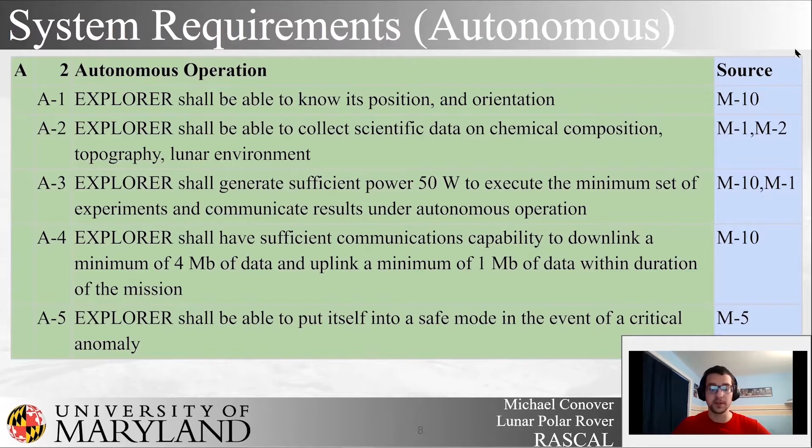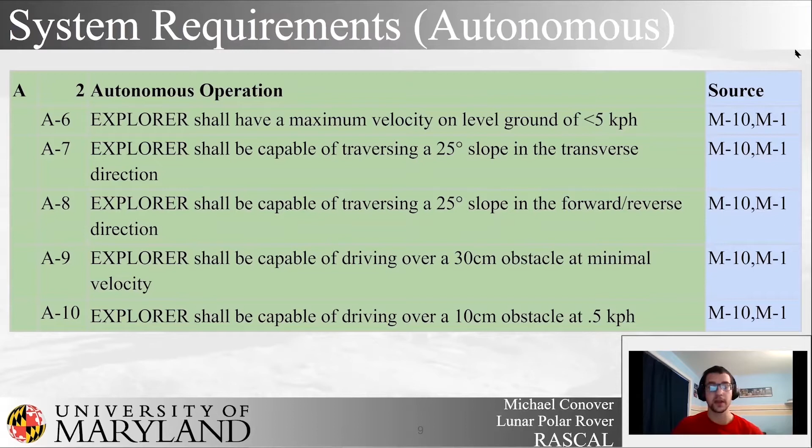Requirements were created for both the autonomous and crewed portions of the mission. Autonomous requirements include knowing position and pose, a collection of high-priority science data, and the ability to enter a safe mode in the event of a critical anomaly. The rover will also have sufficient power and communication capabilities for the operation in this phase, with the ability to have both uplink and downlink with Earth. Design requirements were set for a maximum velocity and slope in which the rover can traverse, as well as capabilities for driving over various sizes of obstacles.

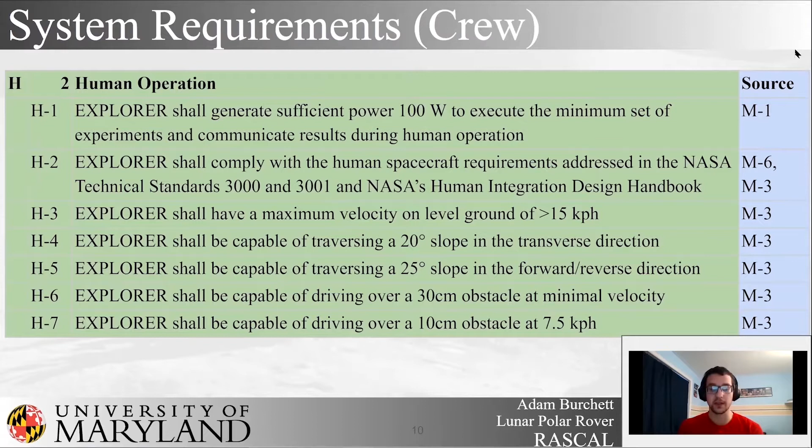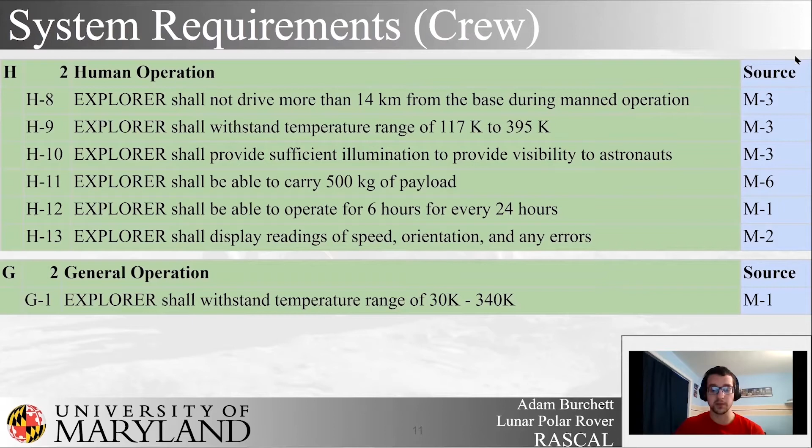Systems level requirements for the 6-day human operation of the mission include the generation of sufficient power needed for EVA tasks, compliance with the NASA technical standards and handbooks on human integration, and maximum velocity, slope constraints, and obstacle clearance requirements during the crewed operation. Explorer will be constrained to a 14-kilometer range for missions away from the landing site, support a payload of 500 kilograms, and will operate for 6 hours every 24 hours during the crewed phase. The rover will be able to interface with the crew and provide information critical to human missions, such as the rover speed, orientation, and battery capacity.

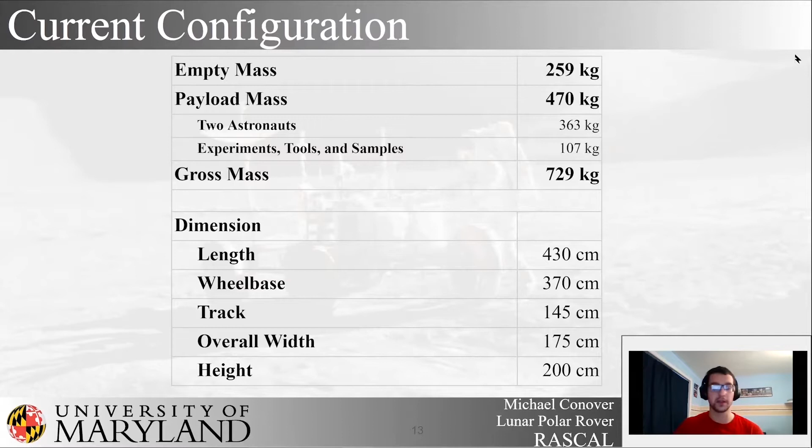The power suite for Explorer includes a battery that will support 6 hours of crewed operation with 90% efficiency. It will operate at 108 volts and will provide 60 amp hours for operation. The battery will have 30 cells in series and will provide 6.5 kilowatt hours of energy and will have a mass of 48 kilograms. Explorer will have 2 solar panel support arms, each carrying a quarter circle panel with a surface area of 1.7 meters squared and an efficiency of 30%.

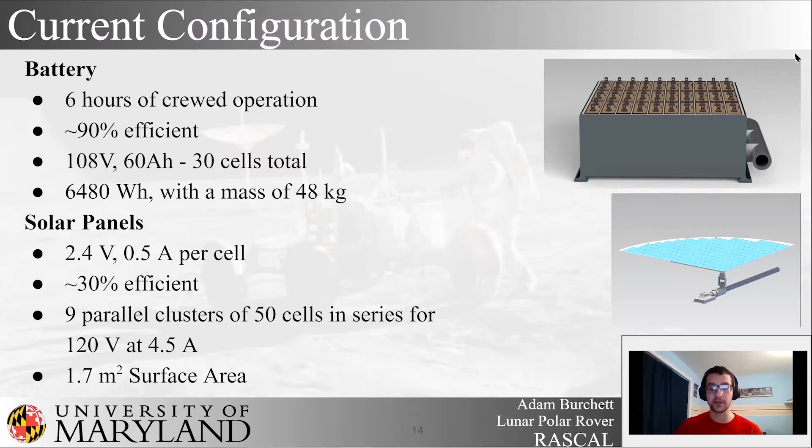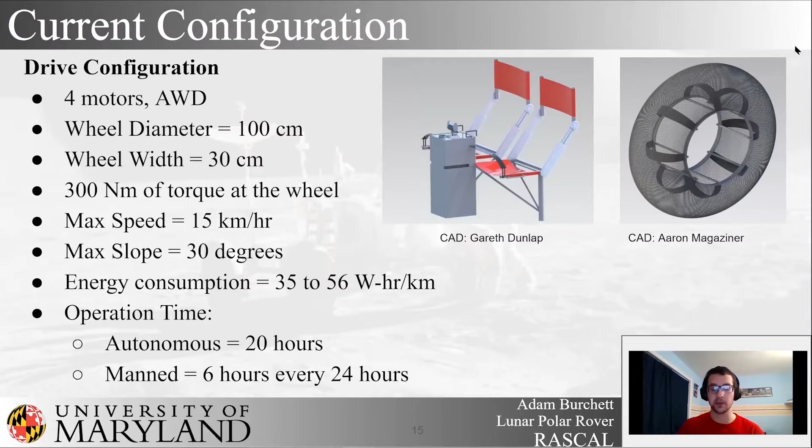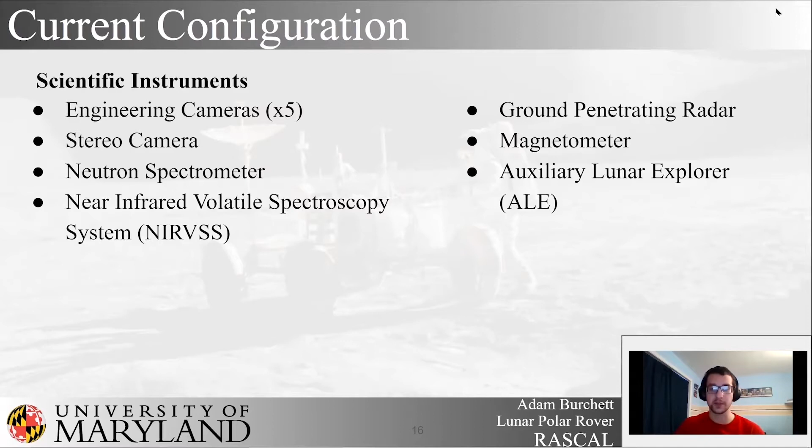The walk-back limit is the limit on how far an astronaut should travel away from the base to ensure their safety in case of a rover failure. From a previous study, we assumed that the average velocity of astronauts was 5.6 kilometers per hour, the average velocity of the rover is 10 kilometers per hour, and the rover can operate for 6 hours.

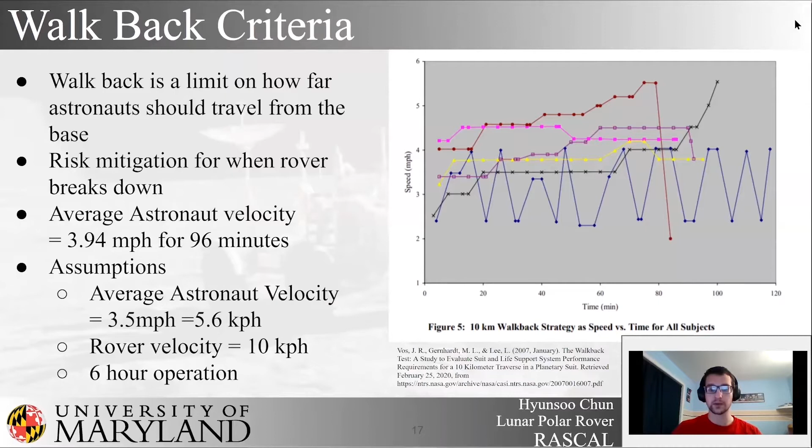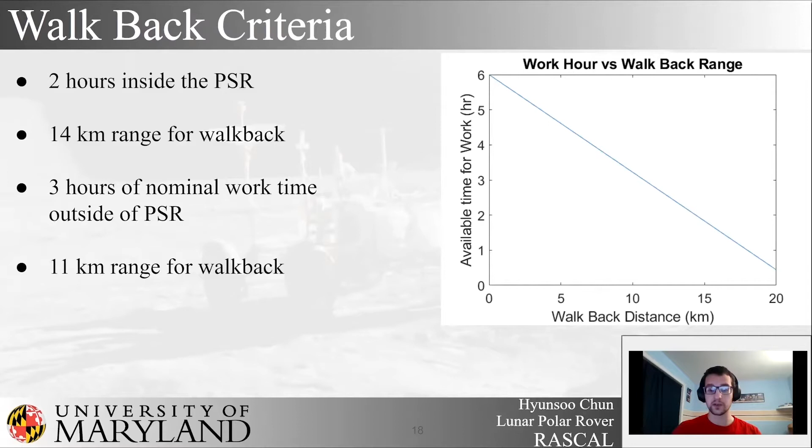Assuming that the astronauts have approximately 2 hours to work inside the PSR, we have concluded that the walk-back criteria is approximately 14 kilometers. If instead the astronauts work outside the PSR for 3 hours, the walk-back range shortens to 11 kilometers. Since astronaut suits allow the astronauts to enter PSRs for up to 2 hours, the PSR has its own walk-back criteria. With the same assumptions, the walk-back criteria for the PSR is approximately 3.5 kilometers.

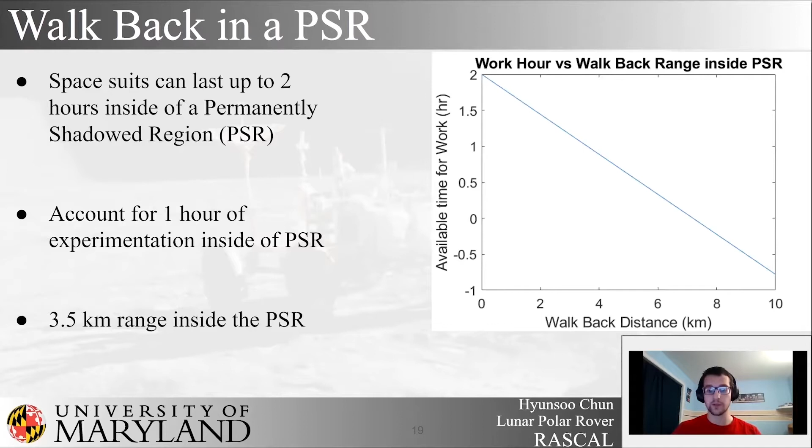The team found it necessary to determine the feasibility of a dual rover design for the Explorer because of the potential benefits. A cost analysis revealed that producing two smaller rovers could save as much as 20% in costs. Safety-wise, the dual rover could provide astronauts with an additional vehicle in case one of the rovers failed during the mission, and could potentially double their walk-back range.

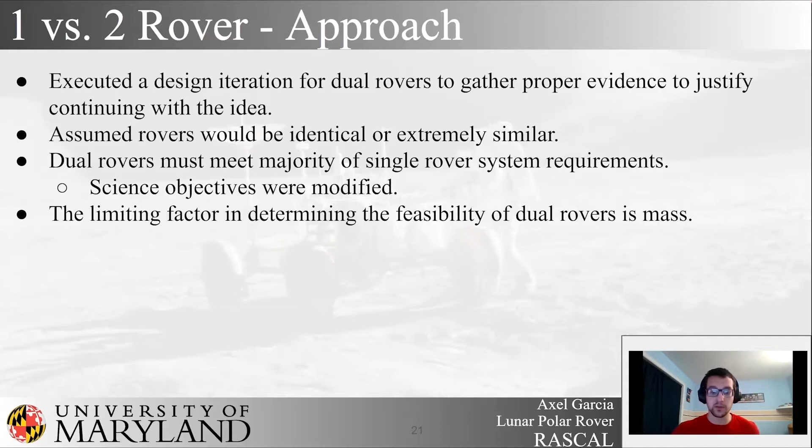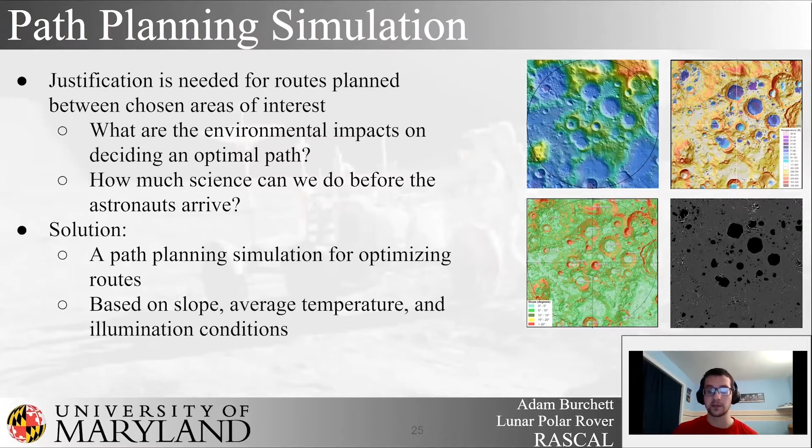In order to have more data-driven decision-making when designing the mission strategy for our rover, we created a path planning algorithm that, on a large scale with a resolution of 10 square meters, would determine the optimal route between two locations on the lunar South Pole. The simulation achieves this by recreating the lunar South Pole environment in MATLAB using a set of contour color maps created from data collected by the LRO, with each map measuring a different environmental variable, such as slope or temperature.

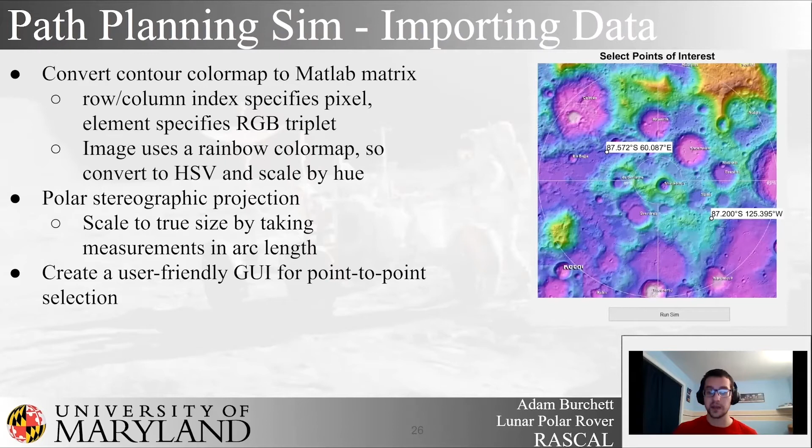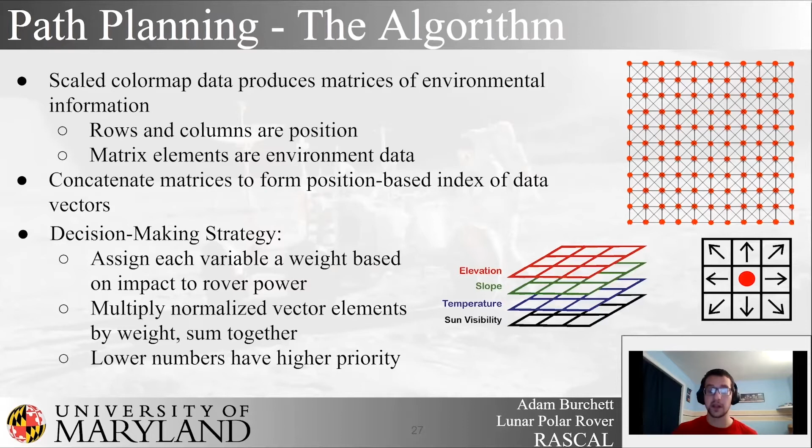The contour maps are integrated into MATLAB as images, then scaled such that the colored data from the image now reflects the environmental data being collected. Pixels are converted to meters by scaling in accordance with the map's projection. Once the dataset for the lunar environment is created, each position on the moon's surface is given a weight based on the impact that the environment at that position has on the rover's power supply. Then, Dijkstra's shortest path algorithm is implemented in order to find the optimal path based on environmental conditions.

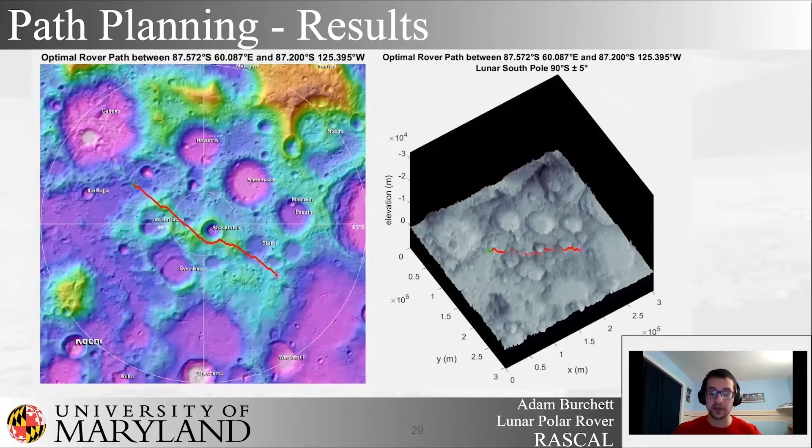Seen on the left is a 2D map of the route between 2 points of interest, and on the right is a 3D representation of the same route. As can be seen, the rover cleverly avoids the ill-suited conditions of the Shackleton crater when traversing between two locations.

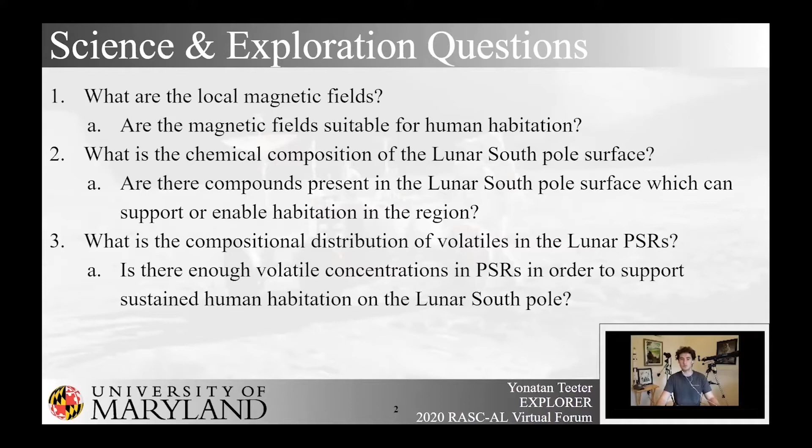The Explorer's mission is based on answering high-priority science and exploration questions. Assessing the local magnetic fields on the lunar South Pole will assure if sites are safe for human habitation. Defining the chemical composition of the lunar surface is vital to understanding geological history and identifying useful materials for crewed missions. Lastly, quantifying volatiles found in PSRs will also reveal information about early solar system history and what compounds are useful for human habitation.

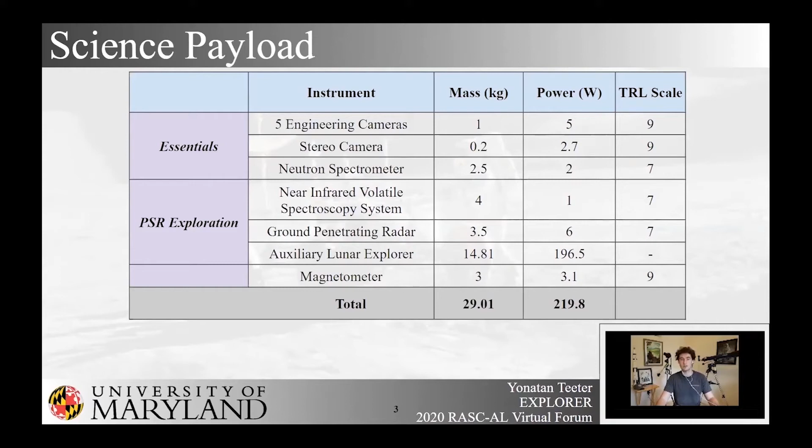The science payload selected will collect data to address these questions. The engineering cameras will perform state of health checks, and the stereo camera will image the surrounding terrain. The spectroscopy systems will prospect for hydrogen concentrations in PSRs. The radar measures lunar regolith densities and will determine feasibility for crewed drilling. The Auxiliary Lunar Explorer, or ALE, will explore the deep regions of PSRs and collect samples. The magnetometer will measure the local magnetic fields.

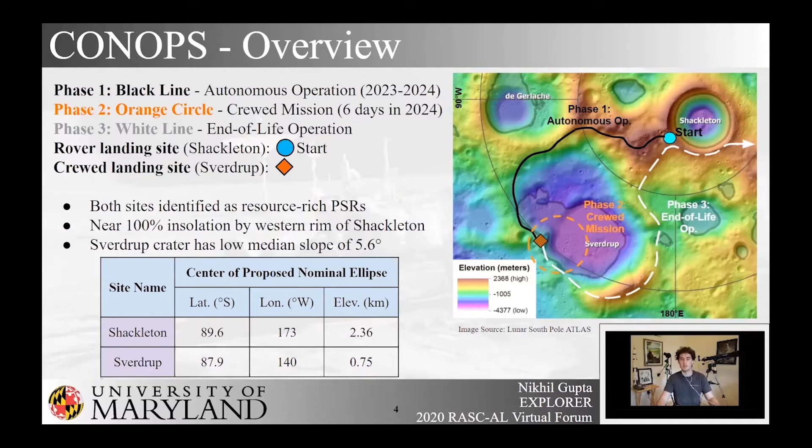The CONOP starts with Phase 1, the 1 year of autonomous operation starting in 2023. Explorer will land at the western rim of Shackleton and prospect it as a future landing site due to its near 100% insolation. Phase 2 involves supporting a 6-day crewed mission in 2024. Landing by the Sverdrup PSR allows for repetitive, non-arduous EVAs due to its low median slope. Phase 3 represents the end-of-life operation as Explorer autonomously travels to other PSRs of interest, taking surface measurements and creating topographic maps.

To begin, Explorer will land on the South Polar Ridge near the rim of Shackleton. Initialization involves establishing two-way communication and calibrating the spectroscopy systems. Explorer will traverse to the far side rim of the Sverdrup crater in one lunar cycle, continually mapping the terrain and taking chemical composition measurements.

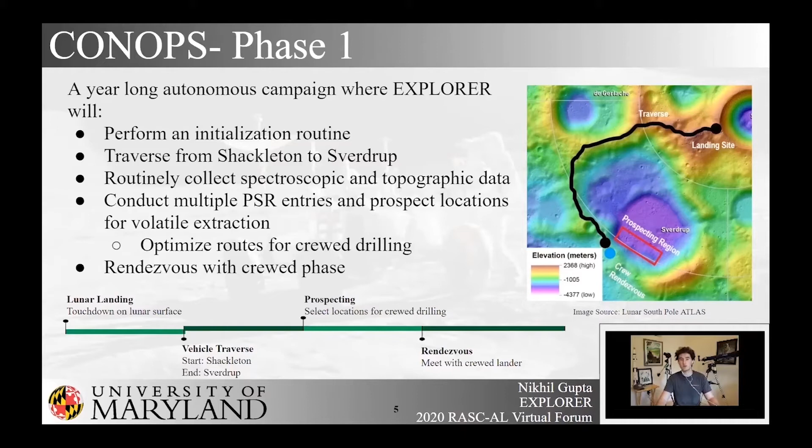Explorer will then conduct a series of PSR entries to map volatile distributions accessible during the crewed mission. Optimal routes to scientific sites will be planned. Lastly, the rover will remain outside the crewed landing ellipse before rendezvous with the lander.

In Phase 2, Explorer will support a 6-day crewed mission. It includes 1 day of autonomous to crewed reconfiguration, 4 days of crewed EVAs, and 1 day of reconfiguration back to autonomous mode. The crew will enter and explore the Sverdrup PSR each of these 4 days.

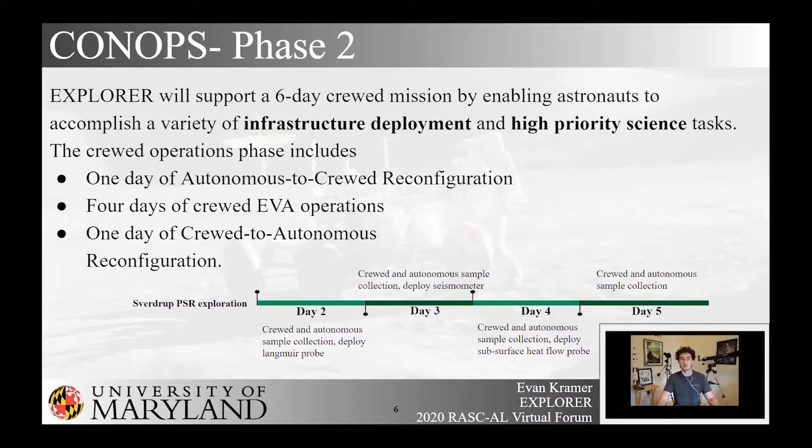After each PSR entry, the crew will deploy a separately brought science experiment along the crater rim. Payload recommendations include a Langmuir probe, seismometer, and subsurface heat flow probe. No instrument deployment is scheduled for the final EVA to accommodate for schedule slippage or unplanned maintenance.

During Phase 3 of its end-of-life operation, Explorer will travel to the eastern rim of Shackleton to deploy the ALE and then explore other nearby PSRs. The rover can support future missions through reconnaissance for landing sites and continue to scout locations for potential lunar habitat. The rover's batteries and solar panels may also be utilized as a power supply in future crewed missions.

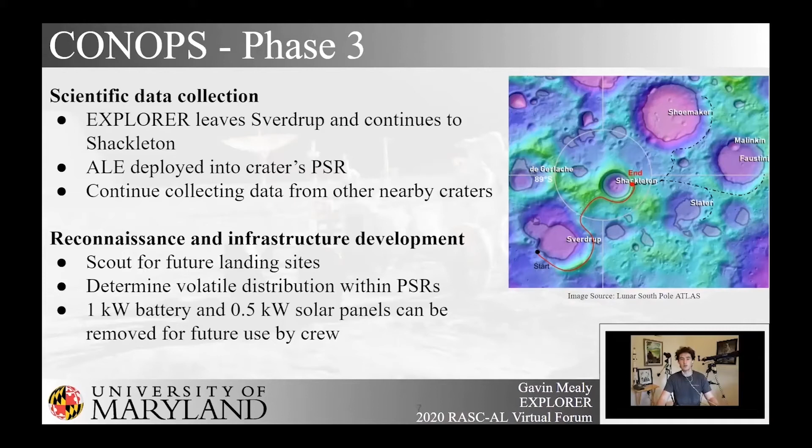The ALE extends the science and exploration capabilities of Explorer. Its stereo camera will take images within PSRs, aiming to form a record of the solar system's origins. The sample caching system will allow for volatile extraction in the deepest parts of PSRs, where there is less reflected light, inaccessible by astronauts. The ALE has a center section to house its instruments and 2 rotating sections with spikes

The tether will be a ½ kilometer in length, use a 3 millimeter diameter Kevlar K49 material, and have a mass of 5 kilograms. Original designs sought to directly power the ALE through a power cable within the tether. However, solely using a mechanical tether with an onboard rechargeable battery cuts mass by 80% and improved power distribution efficiency by 90%.

To support 2 24-volt 120-watt drive motors, an onboard stereo camera, and a drill, a 15.5 amp-hour lithium-ion space-rated battery from EaglePicher was chosen. This low-mass battery outputs 450 watts of power, giving a positive 155-watt power margin.

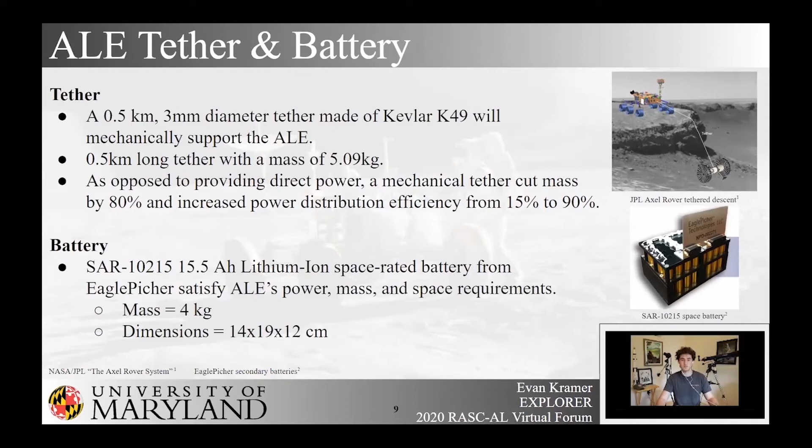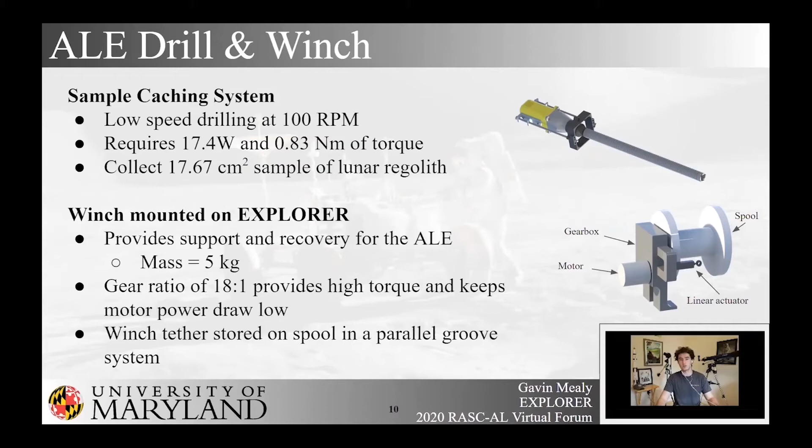The feed system for the winch consists of a linear actuator and a circular guide. Wrapping the tether onto the spool in a parallel groove system distributes the stored stresses between layers and reduces the overall wear. Using the following costing model with the ALE's inert mass, the combined non-recurring and production cost totals to $26.7 million in 2020 dollars, once adjusted for inflation.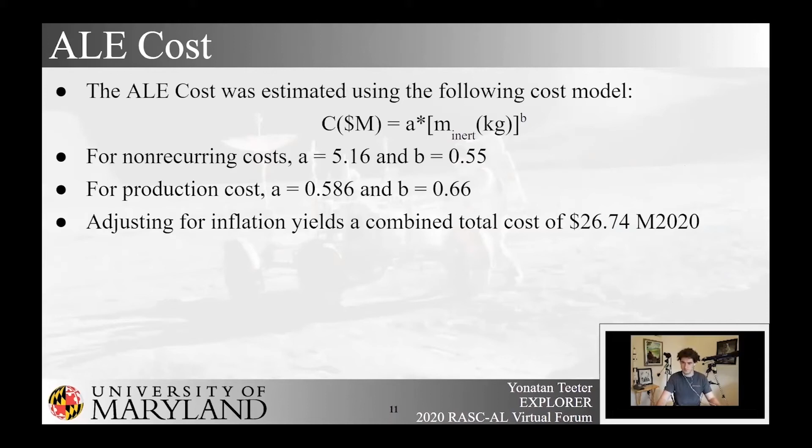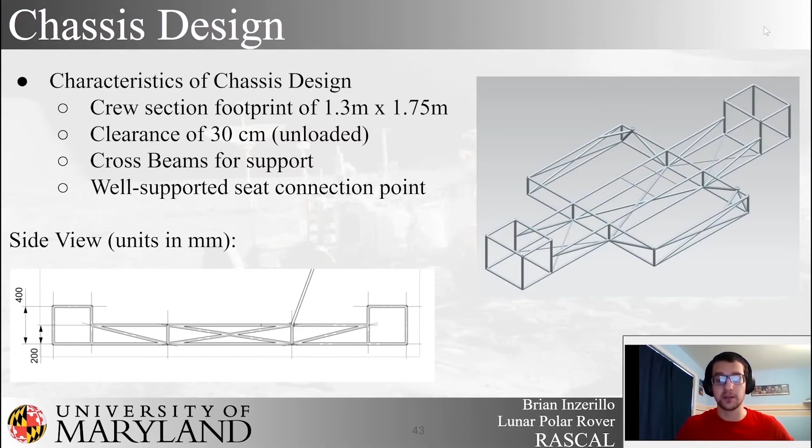This design was preliminarily verified by a finite element analysis to show no yielding under basic loading scenarios and a simplistic crash scenario. The wheel was designed in concert with other domains of the rover using the Bekker model of terramechanics. A woven wire mesh wheel was chosen over other wheel designs for its low mass and flight heritage from the Apollo rovers. The design stands 1 meter tall and 30 centimeters wide, with each wheel weighing 6.7 kilograms. This wheel is theoretically able to climb 30-degree slopes while crewed, even assuming a 20% slip in the soft lunar surface.

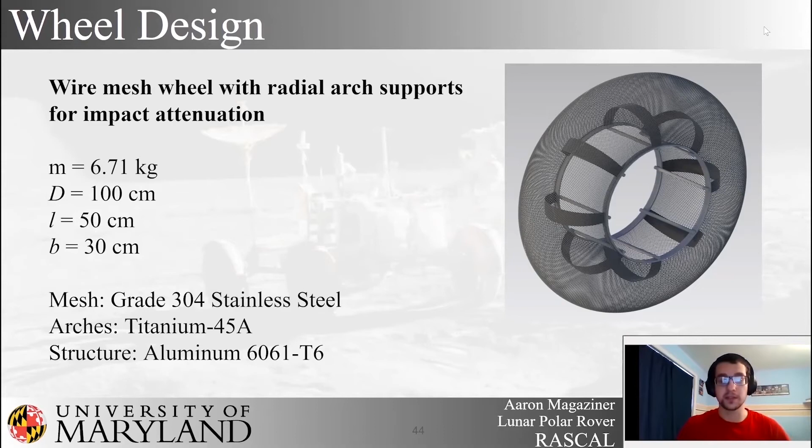To give Explorer full steering capabilities, each wheel is controlled by a linear actuator to provide perfect Ackermann steering. In the event of an actuator failure, the other wheels can work around this failure to ensure full turning stability. At low speeds, the rover can almost point turn, accounting for slippage.

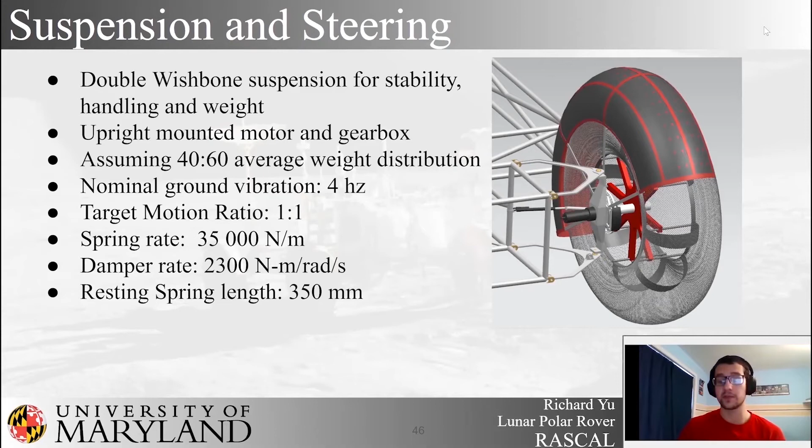One of the key features of Explorer is its reconfigurable nature. Because of this nature, the center of gravity is variable depending on its state. For example, the center of gravity is about 40 centimeters higher when the rover is crewed. This information is fed into the avionics system, where it automatically limits the possible turn of the wheels to ensure full stability of the vehicle during travel. This helps to prevent the possibility of forward and lateral rollover during normal operational circumstances.

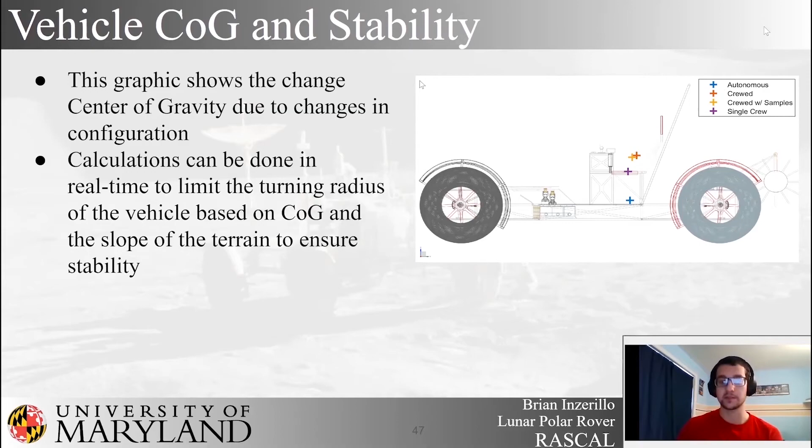Hi, my name is Matthew Phelan. I'll be presenting the crew system slides. For Explorer, crew systems has focused on 3 major projects: adjustable and swivel seating, center console and lighting, and the lunar extravehicular visor assembly display, or LEVAD for short.

Explorer is fitted with 2 side-by-side swiveling passenger seats separated by a center console, which supports the seats while they are in driving position and houses the crew-operated controller. With the center console in the middle, crew members are capable of operating the vehicle from both seats, allowing for both right-handed and left-handed drivers.

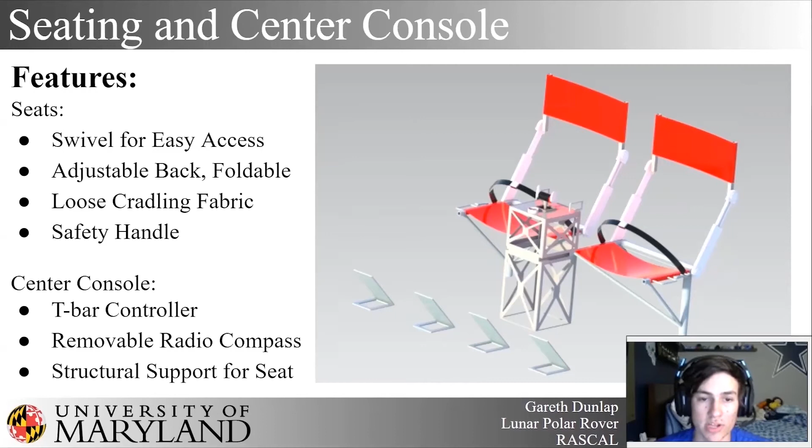Explorer's seats also feature a foldable and adjustable back seat, as well as loose fabric seating on the bottom and back of the chair. The adjustable back allows all possible crew members to operate the vehicle, while the loose fabric seating is designed to work much like a director's chair. It cradles the astronaut's legs and EVA backpack for a form fit all around them, creating both side-to-side lateral stability and support while the rover is in motion.

What's special about Explorer's seats is that they feature a swivel provided by a pair of twin tapered roller joints in the main support beam. The swiveling ability allows astronauts to have easy ingress and egress to and from the vehicle. No more jumping in and out of the rover like in the LRV. These seats move outside of the vehicle to accommodate for the moon's low gravity and the astronaut's prohibited dexterity.

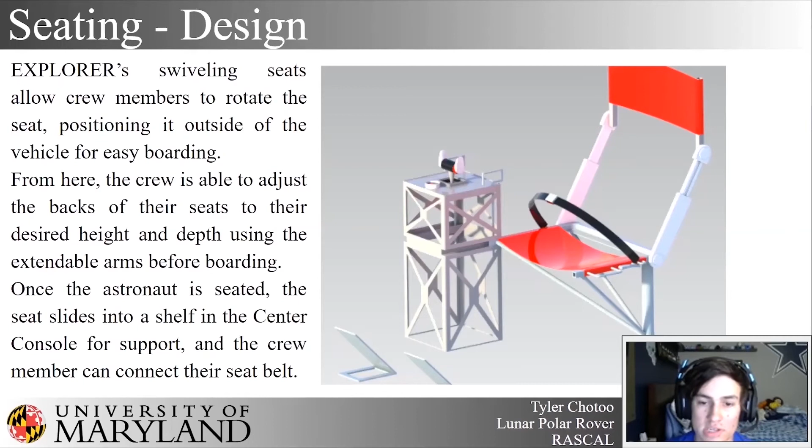When the crew is ready to board, Explorer's swiveling seats allow crew members to rotate the seat, positioning it outside the vehicle where it automatically locks into place. From here, the crew is able to adjust the backs of their seats to their desired height and depth using the extendable arms before boarding the Explorer safely while standing beside the rover. Once the astronaut is seated, the seat slides into a shelf in the center console for support.

The T-bar is able to mitigate fatigue, allowing for astronauts to control it without the need to fully grasp it. They're able to cup their hands and rest it in the T-bar, giving them full control without having to suffer from the fatigue of fighting against the EVA suit to get a firm grasp on the controller. Cupped position is a neutral position in the hand. This is combined with the wings at the ends of the T-bar. It allows the astronaut to maneuver in all directions with decreased fatigue.

The T-bar is a controller that has previously been used in the environment for the same purpose. The design is simple and allows the astronaut to focus more on other tasks and have the ability to react more instinctively to their environment. There is less of a learning curve compared to other controller designs. This will allow for the astronaut to focus on keeping the Explorer stable.

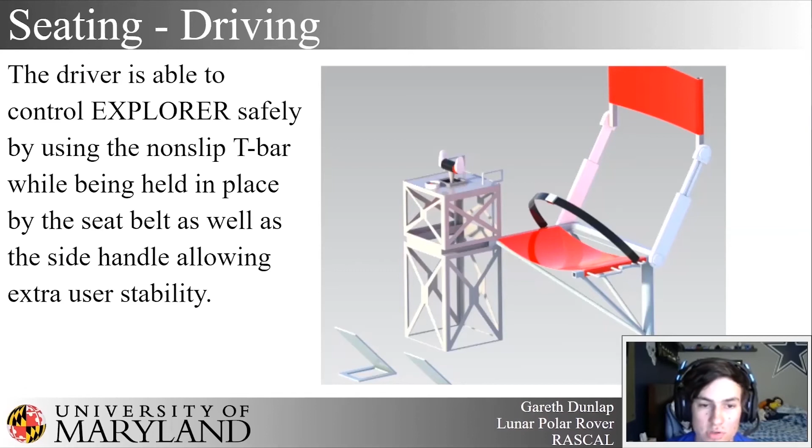In considering lighting on the Explorer, 3 types of light sources were considered: LED, xenon, and halogen. After comparing efficiency and lifespan of these options, LEDs were determined to be the best option. The lighting system on the Explorer has the following requirements: 60 meters of visibility, use less than 30 watts, the ability to change lighting angle to support crew activities, be capable of supporting cameras used for autonomous navigation, and last the duration of the mission.

The lighting configuration consists of 2 LEDs mounted to the pole along with the cameras and sensors used for autonomous navigation. During the autonomous phase of the mission, the lights will be facing down and forward to illuminate the area directly in front of the Explorer for the stereo cameras. After the crew arrives, the lighting angle will be changed to illuminate the area further in front of the Explorer to aid the crew in driving. Lights are also capable of rotating to allow the crew to illuminate areas of interest in the areas they are working in.

The Lunar Extravehicular Visor Assembly Display, or LEVAD, is a helmet-mounted display that is heavily based on another University of Maryland project called Visor. Unlike Visor, which houses a projector towards the upper rear of the astronaut's helmet, LEVAD attaches the projector housing directly above the astronaut's helmet. This allows for astronauts to easily attach and remove LEVAD at will.

LEVAD provides essential information relevant to the crew. This increases productivity and current awareness of the situation. LEVAD is able to connect to the rover as well as the astronaut's spacesuit, providing a synchronized platform for information awareness. LEVAD works by using an off-the-shelf projector that projects through a diffuser mounted externally to the helmet, which then displays onto a piece of teleprompter glass.

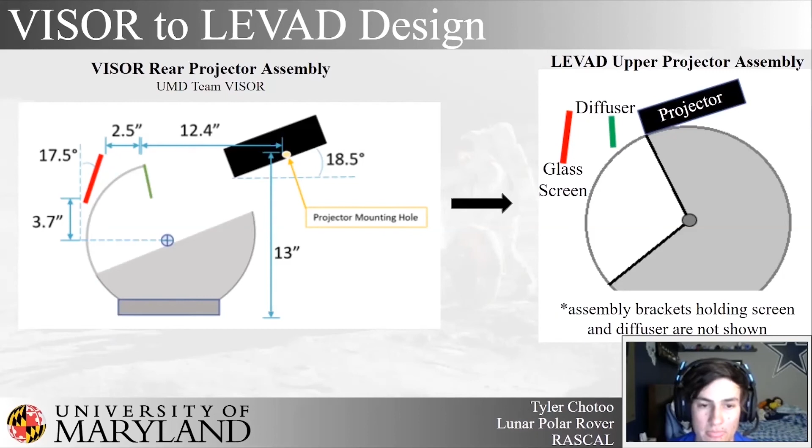LEVAD has 3 different modes of operation that limit the information displayed to the specific actions, such as the Lunar on-foot navigation mode, which displays a digital wayfinder with the direction and distance to Explorer, and the EVA suit battery life. The onboard rover navigation mode, which is currently displayed, displays a digital wayfinder with direction and distance to the lander, EVA suit battery life, and the Explorer battery life.

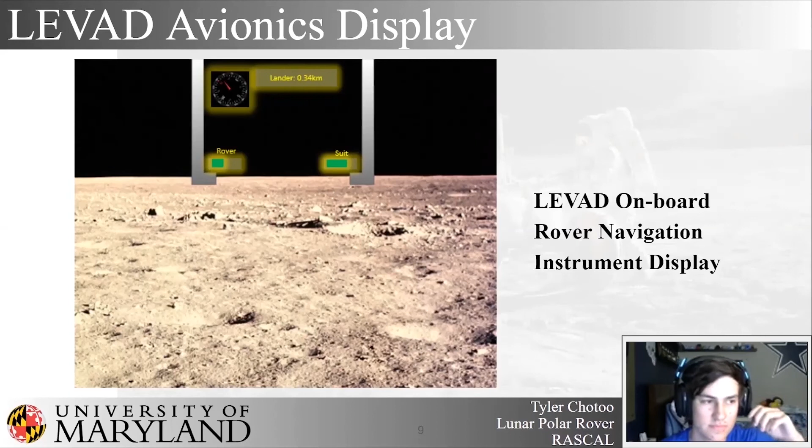All right, that's it. I don't know if that was good.

All right. Navigation is critical in Explorer's ability to operate robotically during the autonomous and end-of-life phases of the mission. Explorer will use stereo cameras and an inertial measurement unit to perform visual inertial simultaneous localization and mapping, or VSLAM. Explorer will also use a long-range stereo camera and a flash LiDAR system for surveillance and obstacle avoidance.

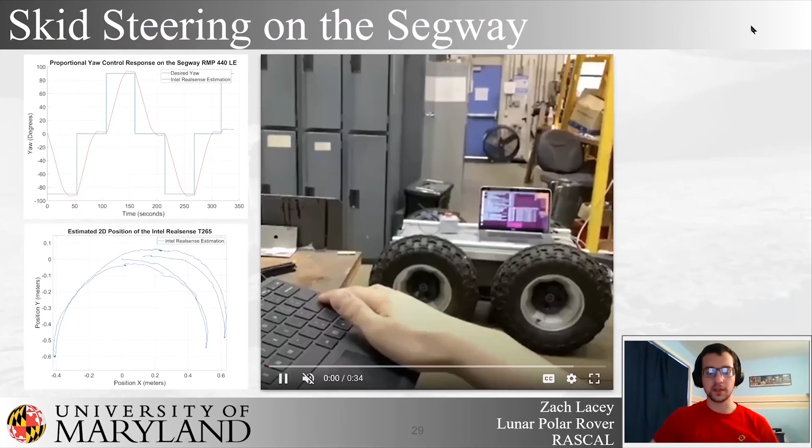To test some of these theories, we did some experiments. The first experiment uses the proportional controller to show control response of the yaw control. The experiment demonstrates the Segway's ability to autonomously yaw at various desired yaw angles on a smooth, flat surface. From our results, we can see that performing yaw maneuvers with skid steering yields decent results as the IMU forms a semicircle arc trajectory.

The ideal scenario would be to generate a perfect semicircle arc trajectory since the IMU is mounted at a fixed distance from the Segway's center of rotation, and the yaw rotation should occur about this point. The results also show that over time, the Segway experiences estimation bias as it performs stationary yaw. This is evident through the generated offset between the initial location and the final location of the IMU estimation. The offset generated suggests slippage of the wheels occurred during the yawing motion.

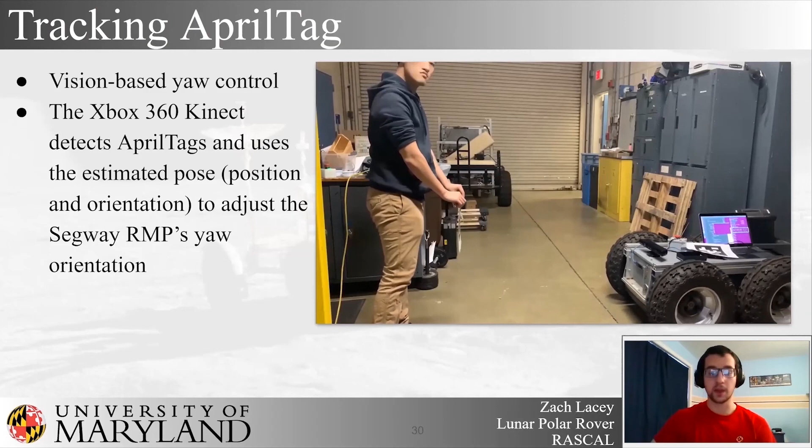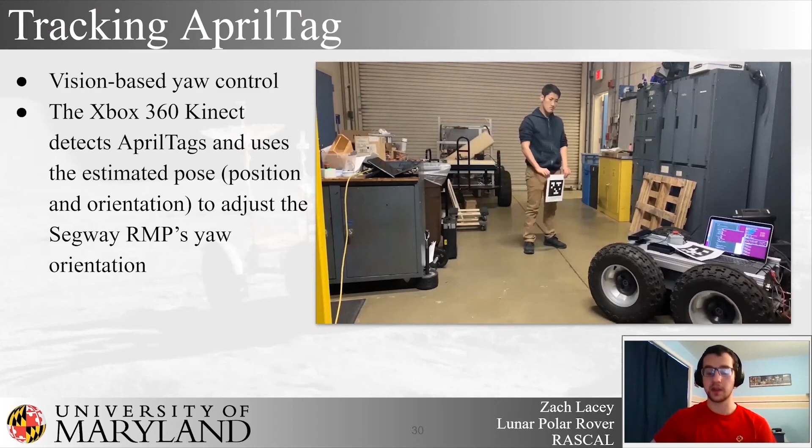We were also able to use April tag detection to develop vision-based tracking via the yaw control. To achieve this, we used an Xbox 360 Kinect stereo camera to determine whether the April tag is detected in the Segway's field of view. If the April tag is detected, determine the pose of the April tag, and determine the yaw angle error between the desired yaw angle of the April tag and the current yaw of the Segway. The yaw error is then used to implement a pre-existing yaw controller, where the feedback control allows the Segway to track the April tag.

In addition to the Segway, the Explorer team had planned to implement the autonomous software on Raven. Prototyping development of Explorer shifted from the Segway to the Raven platform because it can support the autonomous and crew capabilities that are required for the Explorer design. Raven was previously controlled by an Arduino microcontroller that converted the signal from a joystick input into a PWM signal to actuate the motors. Jaguar motor controllers are used to power the motors from the microcontroller signals.